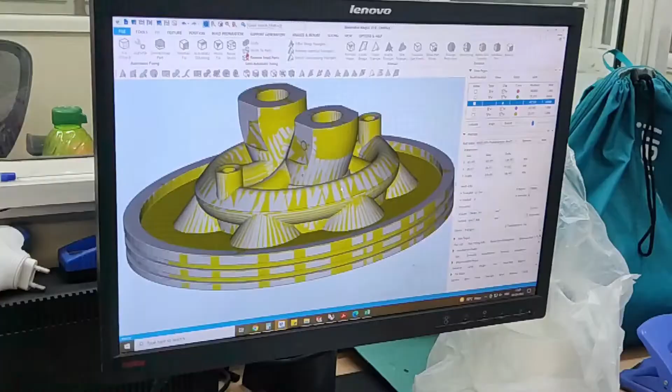Welcome to Objectify Technologies, India's leading additive manufacturing engineering service provider for metal and polymer technologies, commonly known as 3D printing.

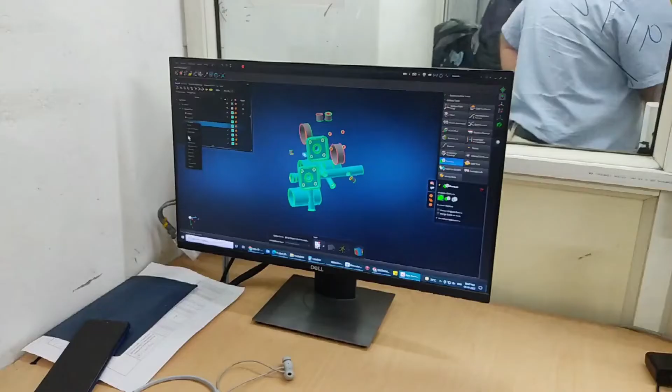Founded in 2013 at IIT Kanpur's Incubation Center by a group of young engineers, the company aims to provide a facelift to the current manufacturing processes in the country by making it much more

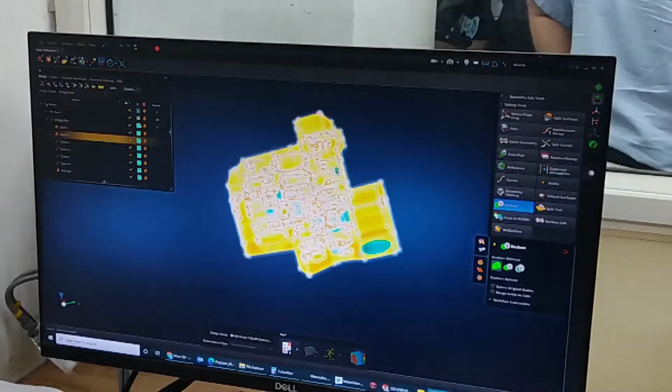digital, leaner, and sustainable. Objectify provides 3D printing designing, material development and manufacturing services to industries ranging from aerospace, defense, automotive, oil and gas, die and mold, and healthcare, among others, doing low-volume, high-value critical production for both new product development prototypes to direct end-use parts.

Objectify's 360-degree solutions start from designing lightweight and complex geometries, which bring a long-term value proposition to the user in terms of fuel efficiency, longer life, and lower failure rates.

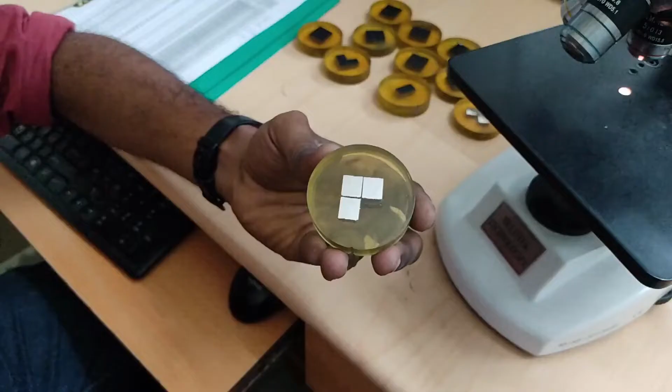Apart from designing, Objectify does application-specific material process parameter development for niche superalloys like Inconel, titanium, niobium, copper, cobalt chrome and steel, and different polymer composites.

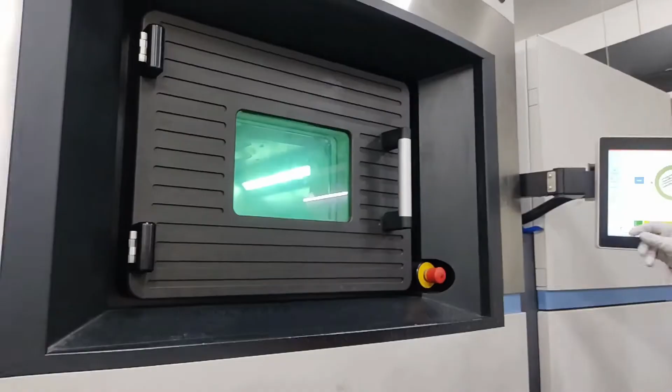Our team, with the developed designs and process technology, manufactures the part through additive manufacturing. The part is manufactured using a minimum amount of materials and with high accuracy and precision.

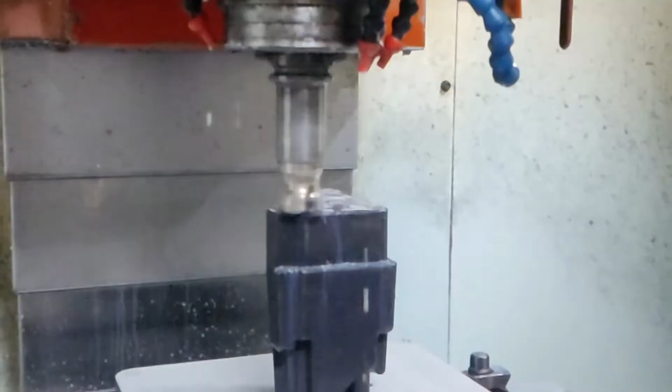Post-processing activities are done to achieve a quality finish, from stress relieving using heat treatment to removing supports and finishing of the part to its final dimension using a CNC milling machine.

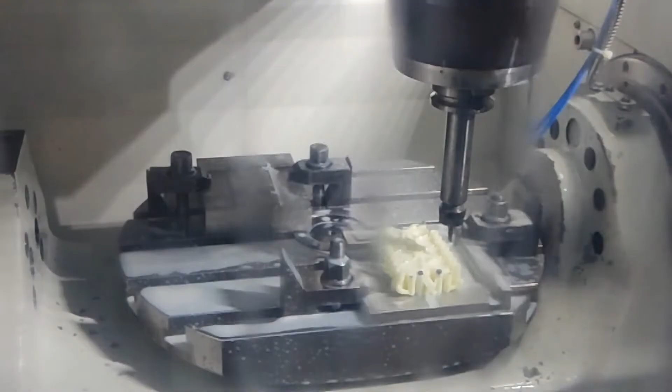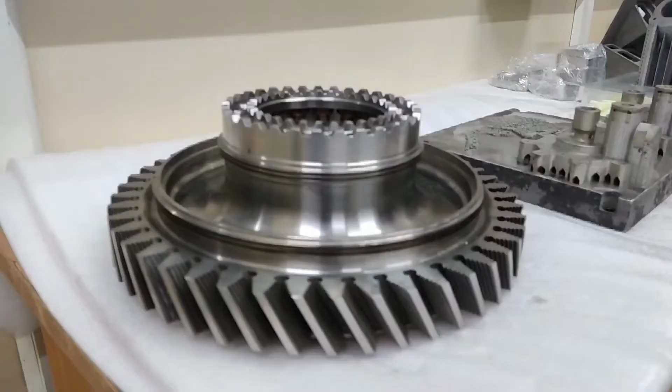The quality of the part is ensured before dispatch by our quality control team, using geometric dimensioning and tolerancing. The final products with complex designs and lower lead time are used in different industries, including defense, aerospace, oil and gas, automotive and healthcare.

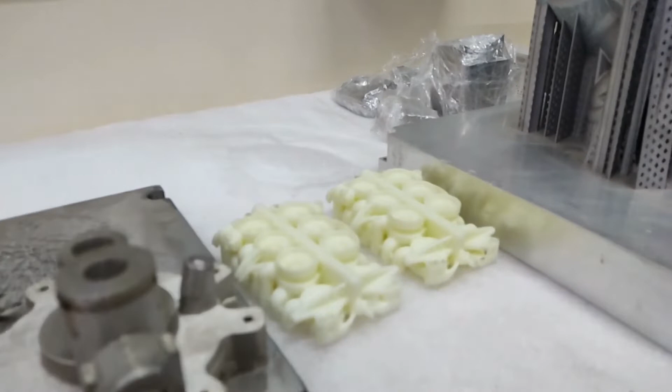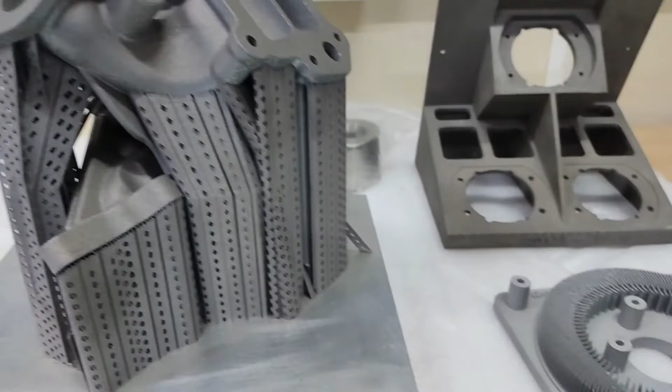Objectify is taking ahead the Industry 4.0 revolution in India and helping the Indian high-end manufacturing industries grow. Our 3D printing services provide partners crucial advantages in terms of part quality and sustainability. Therefore, we aim to be the AM partner for the global manufacturing industries.

Contact Objectify Technologies for high-quality and sustainable additive manufacturing services, which offer your company a much-needed competitive advantage with vastly improved efficiency and productivity.